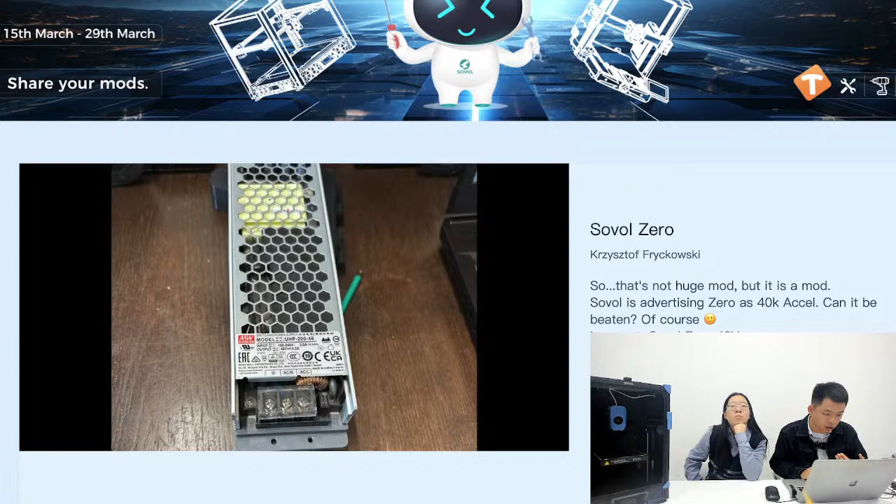Let me go back to the comment. He's kind of doing testing help for Sovol, and he also started to mod it right away. So as he said, it's not a huge mod, but it is a mod.

Whether it is small or big, we welcome everyone to join. Every printer is unique, and I think we really honor the tinker spirit and open source spirit. Later you will see that some projects are very simple, but some people have time and are professional while others do not have time. But anyway, any small mod counts, no matter what brand printer you have. So back to this mod - crazy stuff, not huge, but it is a mod.

Sovol Zero is advertising 40K acceleration. Can it be beaten? Of course. He presents the Sovol Zero 48 volt. Since the electronics are awesome, the X and Y drivers are TMC 5160 with external MOSFET, and it's ready to go on 48 volts out of the box. I thought, why not play with it? So he did some research around the board.

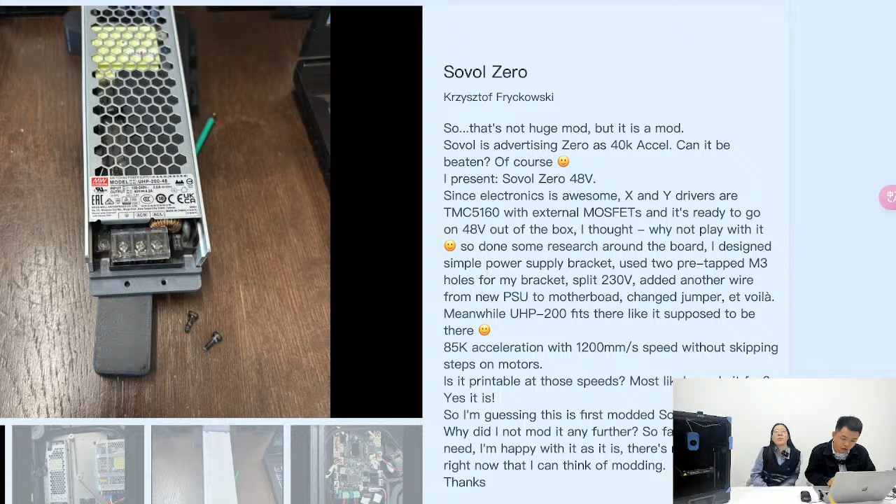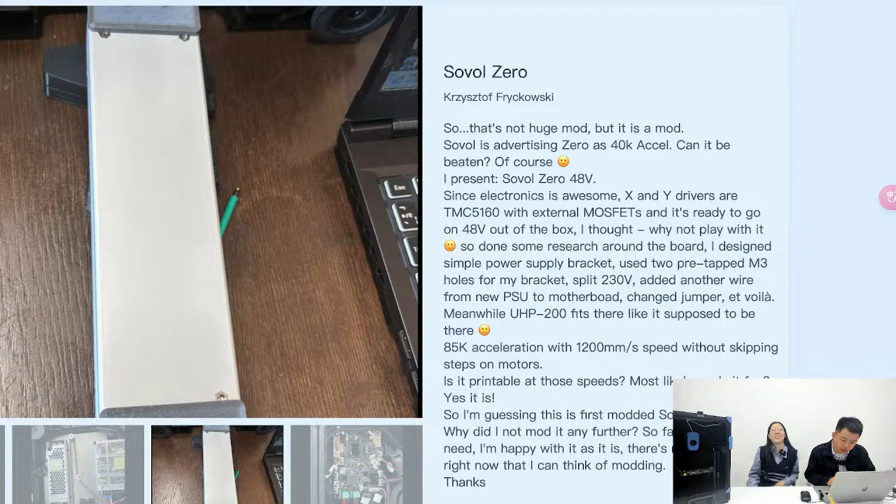I designed a simple power supply bracket, used the two pre-tapped M3 holes for my bracket, and split the 230 volt. Added another wire from the new PSU to the motherboard, changed the jumper - et voilà! And meanwhile the UHP 200 fits there like it's supposed to. It kind of became like, wow.

85K acceleration with 1200 millimeter per second speed without skipping steps on the motors. Is it printable at those speeds? Most likely no. Is it fun? Yes, it is. So I'm guessing this is a first modded Sovol Zero.

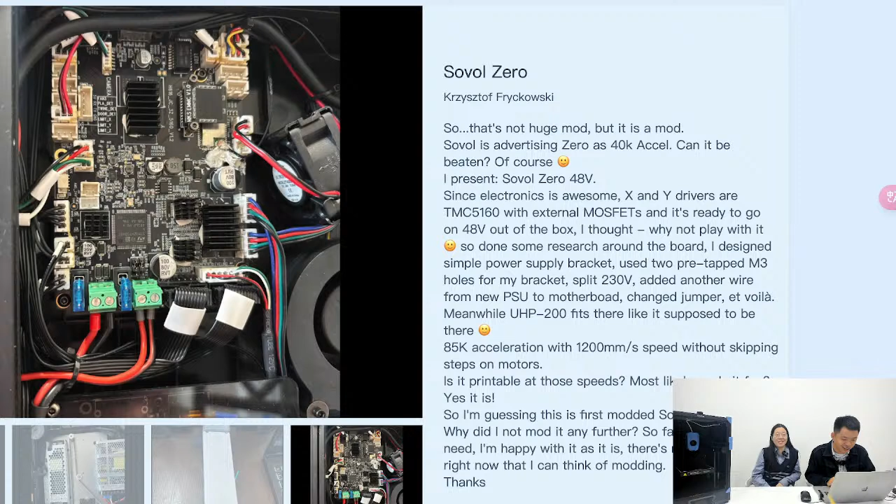Why did I not mod it any further? So far there was no need - I'm happy with it as it is. There's not much more right now I can think of modding. Great, yes, this is the first mod of the Sovol Zero, and this is fun.

Let's go back to the other mods. Maybe we start with the SV06 mods. SV06 is a really popular model of Sovol, back from about 2 years ago.

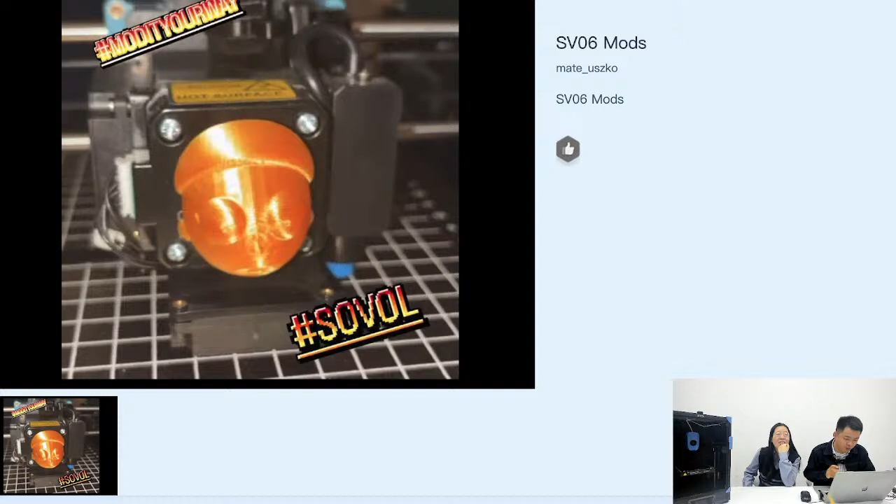This user is mate_uszko, his mod is very simple - he just changed the extruder knob. It's pretty simple but interesting - I think when the 3D printer is printing, the head will scroll upside down. So a very interesting one.

Oh, this one is something interesting - so many mods. This is the SV06 mods, it's from Arka. So a modded SV06. Julia, would you like to read out the description of the mod?

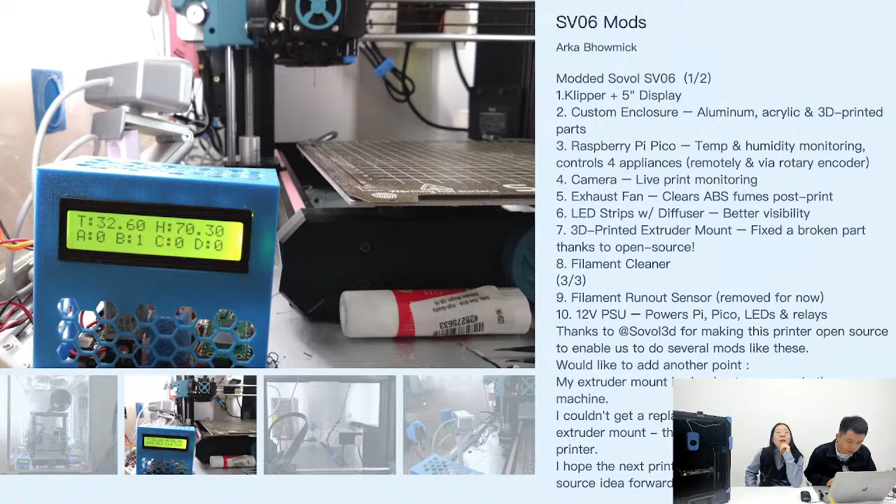Modded Sovol SV06. The first one is the Klipper plus 5 inch display. The second one is custom enclosure aluminum, acrylic and 3D printed parts. The third one, Raspberry Pi Pico temperature humidity.

Humidity monitoring, controls four appliances remotely, and rotary encoder. The fourth one is camera live print monitoring - this is my favorite feature. The fifth one is exhaust fan, clears ABS fumes post print. The sixth is LED stripes, with diffuser, better visibility.

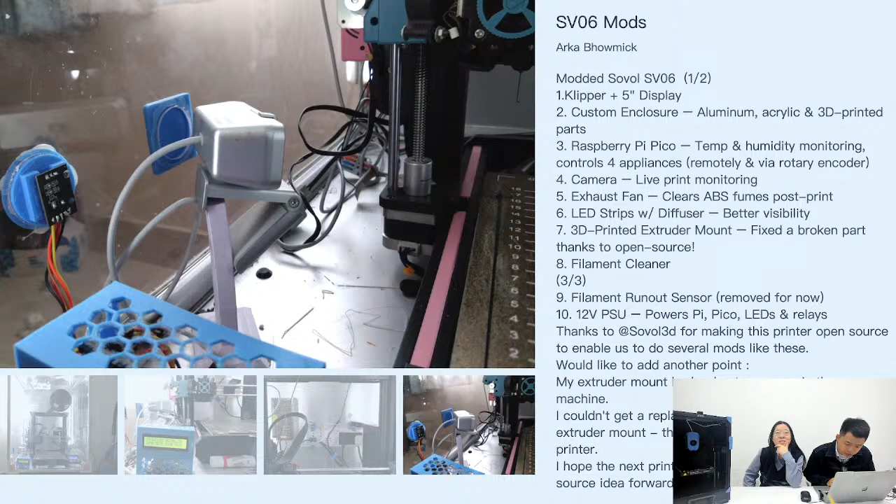Then it is a 3D printed extruder mount to fix broken parts, thanks to open source. The eighth one is a filament cleaner, and the filament runout sensor removed for now. 12V PSU, powers Pi, Pico, LEDs and relays. Thanks Sovol 3D for making this printer open source to enable us to do several mods like these.

Would like to add another point. My extruder mount broke due to an error in the machine, so I couldn't get a replacement. So I printed another extruder mount thanks to the open source of this printer.

The most important thing is... I hope the next printer would take Sovol 3D's open source idea forward. I think sometimes we lack support for replacement parts of some printers, whether we stop manufacturing or it still exists, but anyway, I think the open source part gives the user another possibility or solution to fix it.

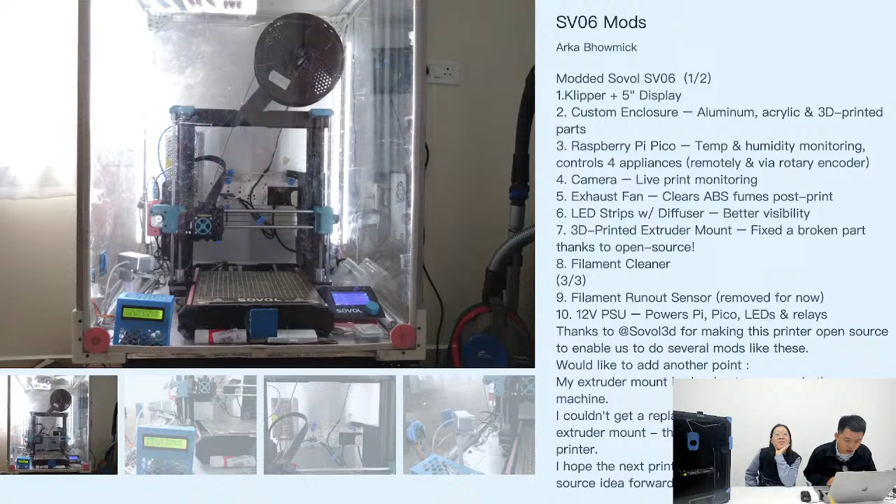Another one is from, I think, another brand - another mod. It's from this user called 3diocrity, so it's a Voxelab Aquila X2 mod. He presents the current form of his ever-evolving Voxelab Aquila X2.

It's one of the 3 printer lineup that may get a shake up this year if I can get my hands on the Sovol Zero.

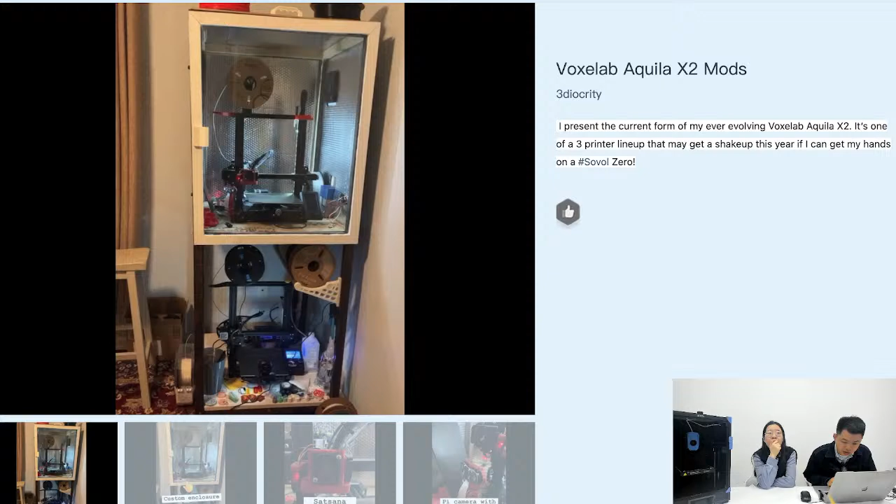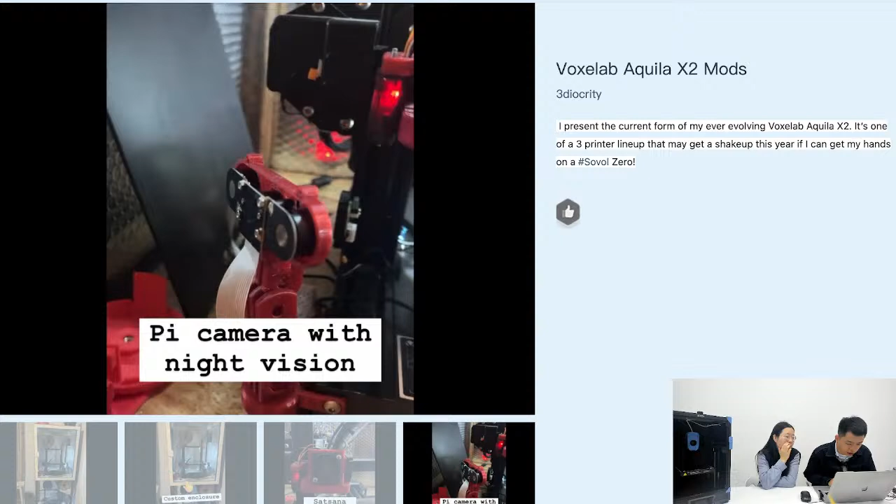Yeah, custom enclosure. So I think the last model we showed also had this big enclosure, right? He just enclosed everything - that's the Sovol 06. He also has this Satsana fan shroud, and a Pi camera with night vision. That's awesome. I think everyone has seen that meme picture - there are so many sounds at night you don't notice, but once the printer makes any sound, you immediately wake up. So this Pi camera also provides an interesting function for that.

Let's check out some more comments here. Flex Chen said he's excited to soon get back to modifying Sovol printers.

For Friendly said, I keep my printers with stock parts. Yeah, definitely not everyone is interested to mod the printer, but anyway, compared to other brands, we do have this extra fun factor for it.

So let's go to another mod here. Wow, this one is awesome - it looks like a PC, like a computer, not a 3D printer. This is so complex, yeah, it's crazy.

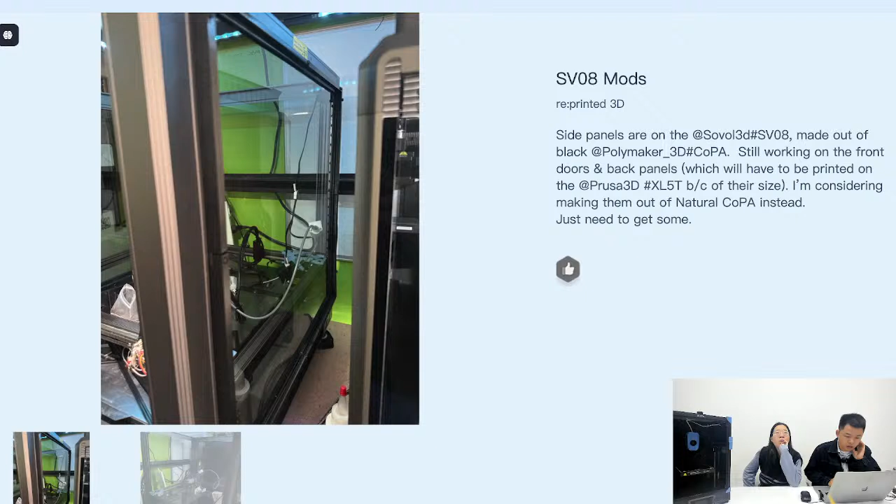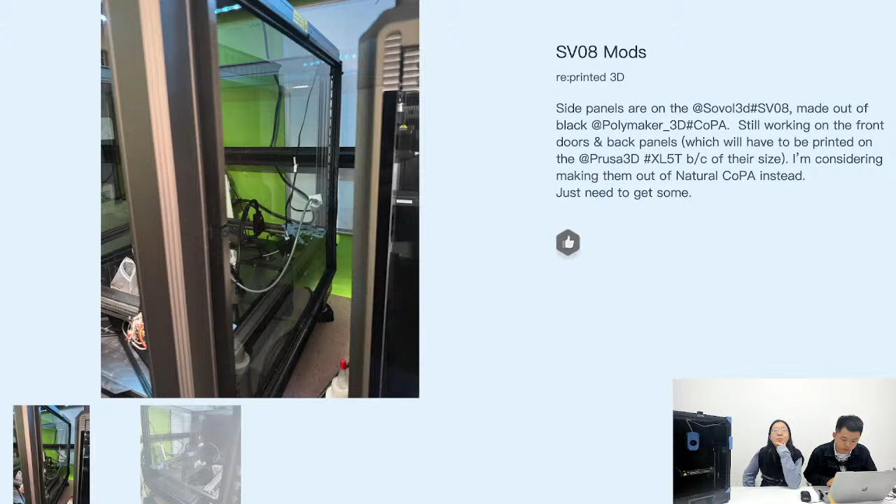So there are SV08 mods. In the contest, many people uploaded mods about the SV08 - the number of SV08 mods is about 50. This work is by reprinted3D. The panels on the Sovol 3D SV08 are made out of black Polymaker CoPA. Still working on the front door and back panels, which will have to be printed on the Prusa XL5T for the size. Considering making them out of a Natural CoPA instead - just need to get some.

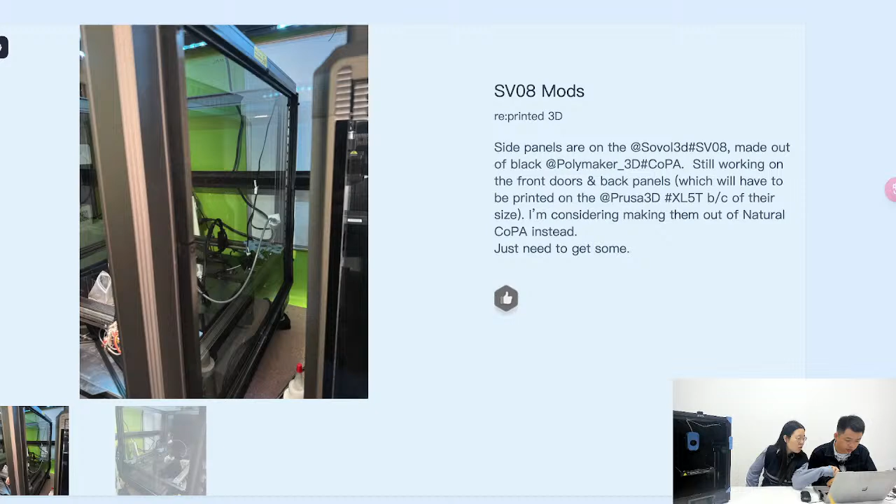Here we can look at the overall pictures. Yes, okay, another picture. Wow, this is awesome, yeah, this is awesome.

There's another comment here - boys custom 5 said he saw a mod to cover part of the SV06 Plus power supply fan to make it quieter. He noticed the SV06 Plus Ace Plus fan is also loud, and asked if we have any recommendations for how to make it quieter.

Temporarily we do not have any suggestions, but we will feedback to the company, and I think that's why the community is also important for all the users. If there are any other solutions you find out with other users, maybe you could try them out. For us, we designed this printer to balance all the performance, so that's what we finally got - it's what you'd call loud, but that's the best solution we temporarily have. So maybe from the community you could find other solutions, like the cover part for the SV06 Plus, and later some other customer will share their designs, usually for free, and you could try them out.

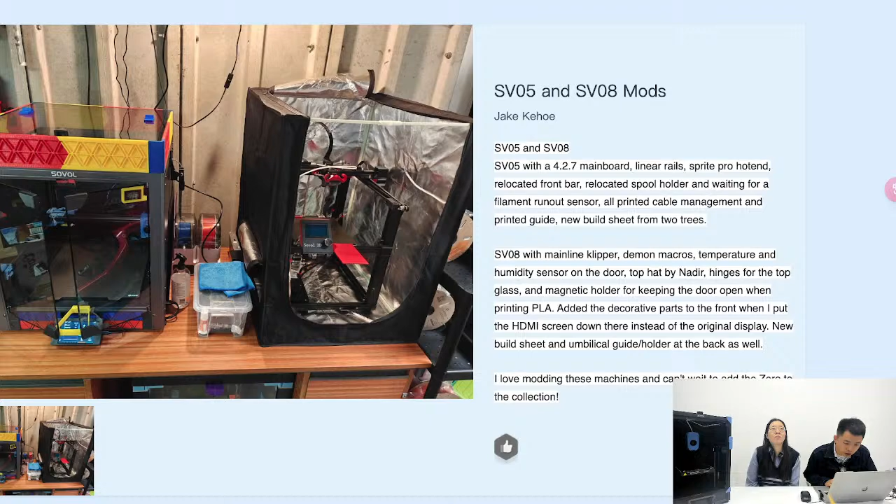4.2.7 mainboard, linear rails. Oh, he changed his structure to linear rails, and the Sprite Pro hotend, relocated front bar, and also relocated the spool holder and waiting for a filament run-out sensor. All printed cable management and printed guide. New build sheet from 2 Trees, and also with an enclosure.

So Julia, yeah, SV08. SV08 with mainline Klipper, demon macros, temperature and humidity sensor on the door, top hat by Nadir, hinges for the top glass, and a magnetic holder for keeping the door open when printing PLA. Added the decorative parts to the front where I put the HDMI screen down there instead of the original display. New build sheets and umbilical guide holder at the back as well.

I love modding this machine and can't wait to add the Zero to the collection.

Yeah. Yes, many people look forward to adding the Sovol Zero.

We can look at the comments. Jason herself: excited to get my Zero, order is impatiently waiting, thanks for the great work. We look forward to your great work on Sovol Zero. If you have a chance, you can share your beautiful work on the Facebook Zero official group.

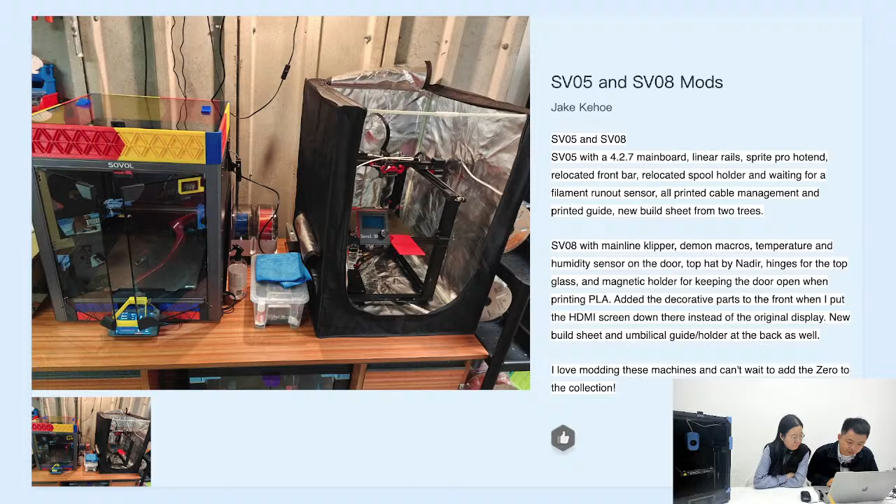And then we go to this SV06 Plus mode. Okay, this is also a very awesome old model. It's a bigger version of the SV06, capable of printing most life-size prints, more or less.

Okay, so I think JR 3D Decorations asked when Sovol Zero's two-head will be for the SV08. We are still working on it. I know every, maybe not every, but most customers of the SV08 want the Sovol Zero's new two-head.

Yeah, actually there is also a vote from our best admin Rory, he made a vote in the SV08 official user group asking if anyone wants Sovol to make this upgraded Sovol Zero two-head for the SV08. As far as I know, there are more than 200 people who voted, and more than 60% voted yes. So I fed back this post to the company, so we are already working on it.

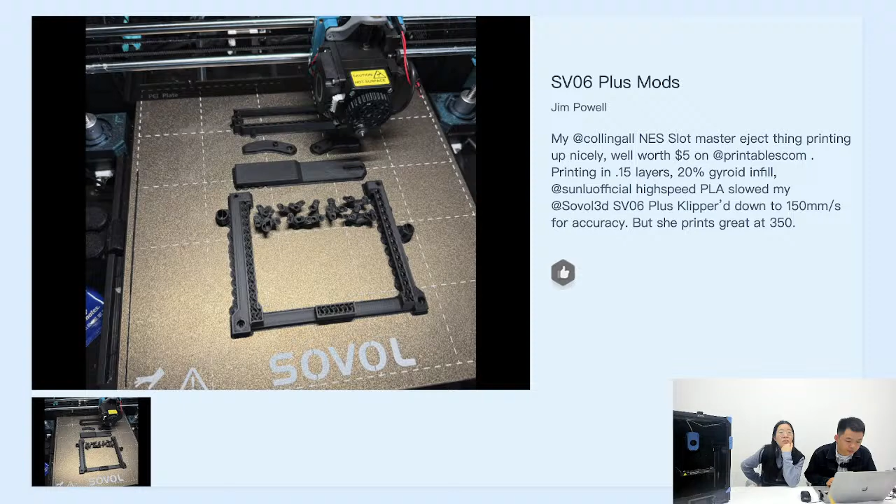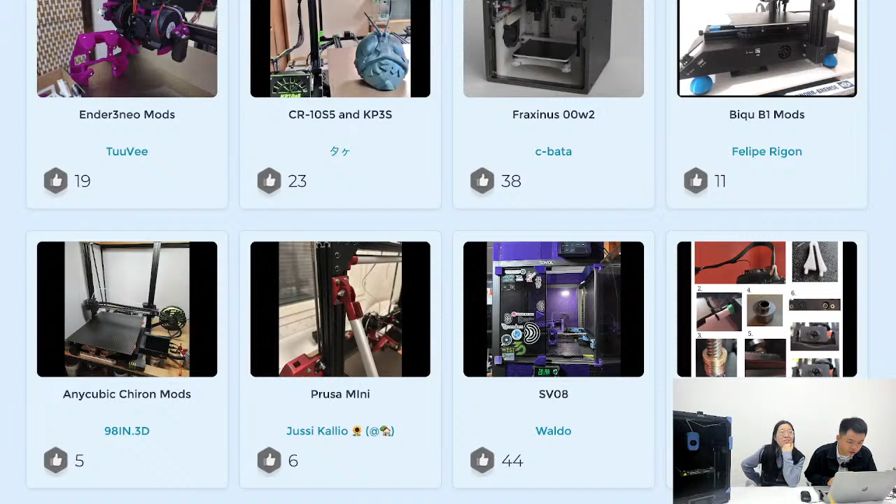So then we go to the Ender 3. Julia may not own an Ender 3, but it's the most popular 3D printer before Bambu Lab. It's a really classic model, most people know it, and most people maybe have one. So, okay, exactly, this model is called the Ender 3 Neo.

Since Creality made so many Ender series printers: Ender, Ender Pro, Ender V2, Ender Neo, Ender V3, Ender V3 Plus, Ender V3 SE, I don't know, so many models. Yeah, it's great I still remember the names. I kind of worked for Creality for 3 to 4 years, back from around 2018 to maybe 2021, 2022. So anyway, back to this mode.

And this is also the Creality CR10S5 and the Kingroon KP3S.

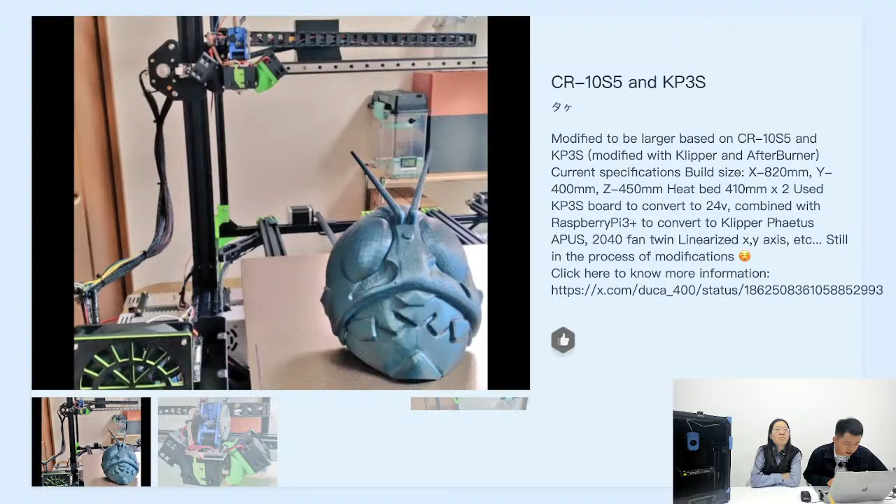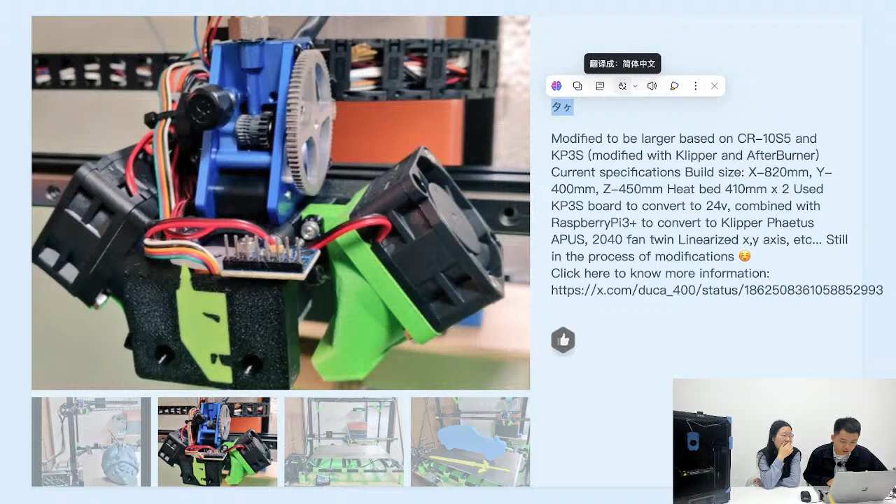Oh, this is a really awesome one. From a customer, his name is... he's Japanese, so sorry, I cannot speak his name, but I think you could see it. Maybe I'll use some translation here. Is there any translation? No. Maybe I should change to English. Anyway, thank you for joining the contest.

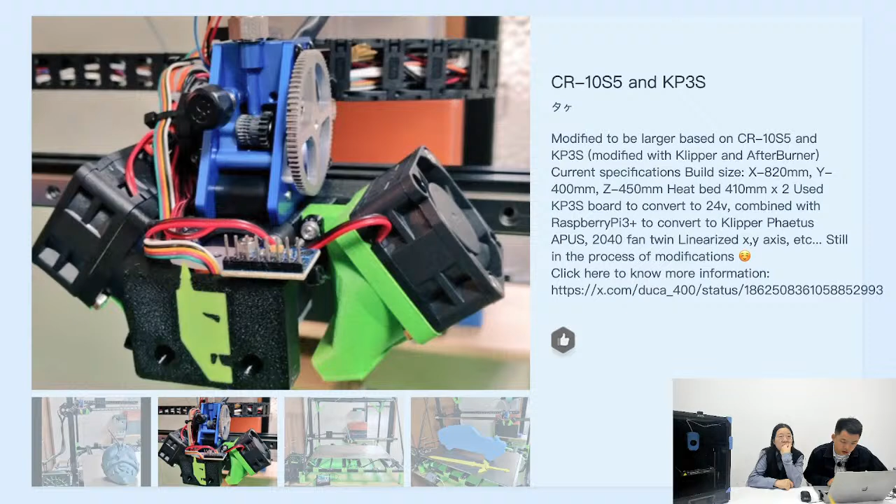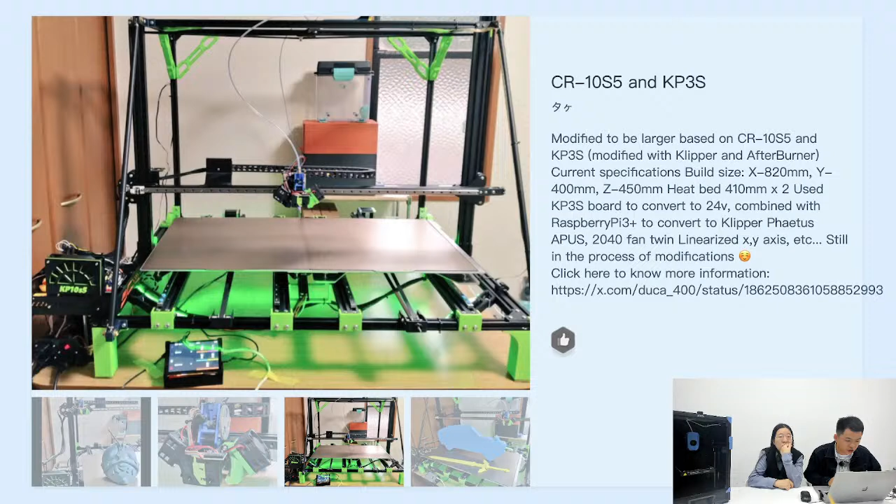Let me read through it. Modified to be a larger based CR10S5. I think till today there are still very few options for a bigger print size, maybe a huge print size, maybe life-size build size. Even today there are only a few models, and the print size is 500 by 500 by maybe 400 millimeters.

Anyways, modified to be a larger based CR10S5 and KP3S, modified with Klipper and Afterburner. Current specification build size: X-axis is 820 millimeters, this is huge. Y-axis is 400 millimeters, and the offset Z-axis is 450 millimeters. Heat bed is 410 millimeters times 2, using KP3S board to convert it to 24 volt, combined with Raspberry Pi 3 Plus to convert to Klipper, Phaetus APUS, and 2040 fans, twin linear rails on the XY axis.

Wow, okay, etc. Still in the process of modification, so still not finished. We are really looking forward to it if you will share any further progress of your modification. This is a really huge printer, but I think this will also be a really fast and great quality printer.

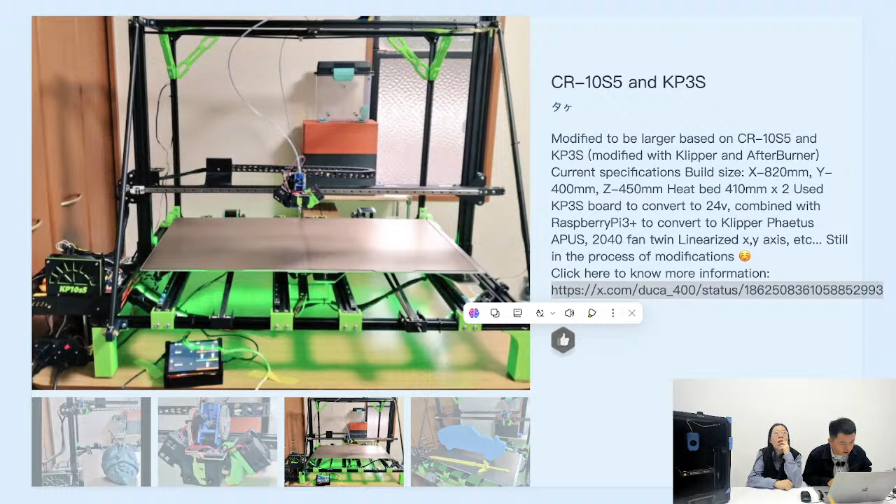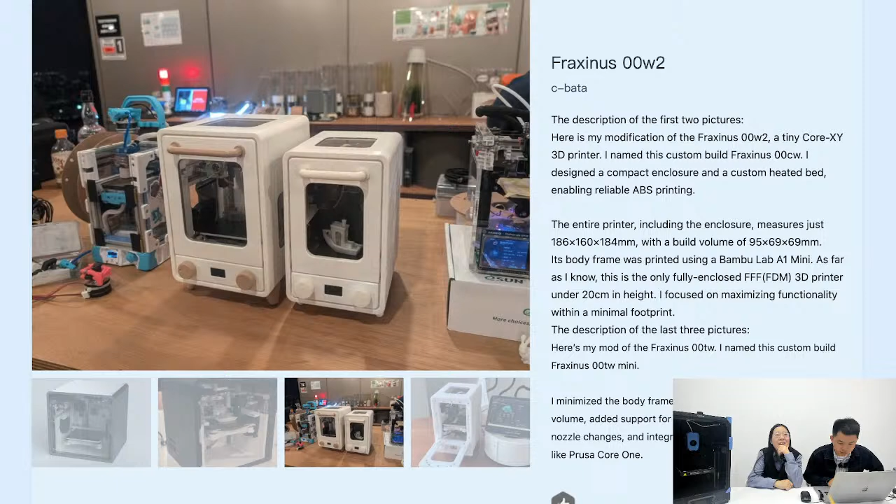So if anyone is interested in this customer's mod, you may check out his mod link. And this is the one that Yulia likes the most, I think. Maybe Yulia will introduce you to this printer because she thinks this is a really awesome printer since the customer kind of built it from scratch. So, Fraxinus, here is his modification.

The Fraxinus 00W2, a tiny Core XY 3D printer. He named this custom build Fraxinus. How to pronounce it? Yeah, it's a 00CW.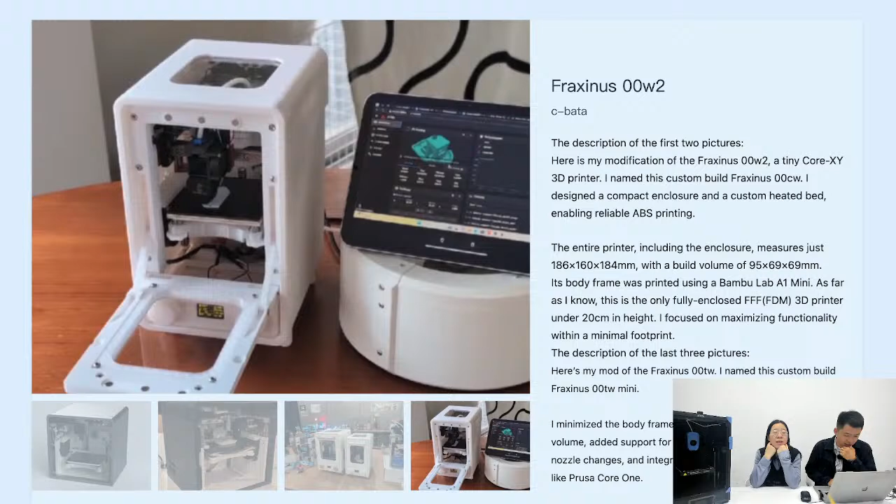He designed a compact enclosure and a custom heated bed, enabling reliable ABS printing. The entire printer, including the enclosure, measures just 186 by 160 by 184 millimeters, with a build volume of 95 by 69 by 69 millimeters.

Its body frame was printed using Bambu Lab A1 Mini. As far as I know, this is the only fully enclosed FDM 3D printer under 20 cm height. It focused on maximizing functionality within a minimal footprint.

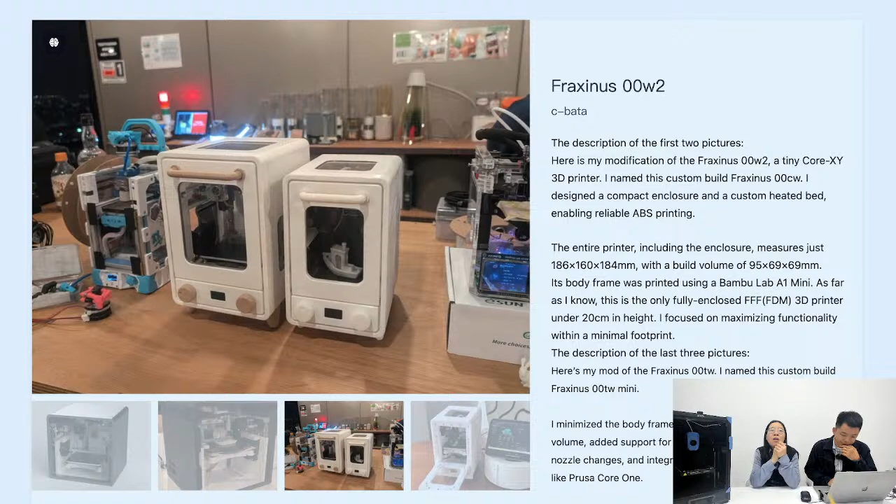The description on the last screen is his mod of Fraxinus 00TW. He named this custom build Mini. He minimized the body frame with only a slight reduction in print volume, added support for Bambu Lab's A1 hotends for quicker nozzle changes, and integrated 14mm fans on the back panel like the Prusa Core One.

Oh, yeah, yes, oh okay. So this customer kind of combined every advanced stuff, whether it's aftermarket accessories or all the latest brands like Bambu Lab, which is a very popular solution, to combine everything and build it from scratch. So this is really what the mod is all about. So yes, he built this thing he himself ever wanted. So this is really just awesome.

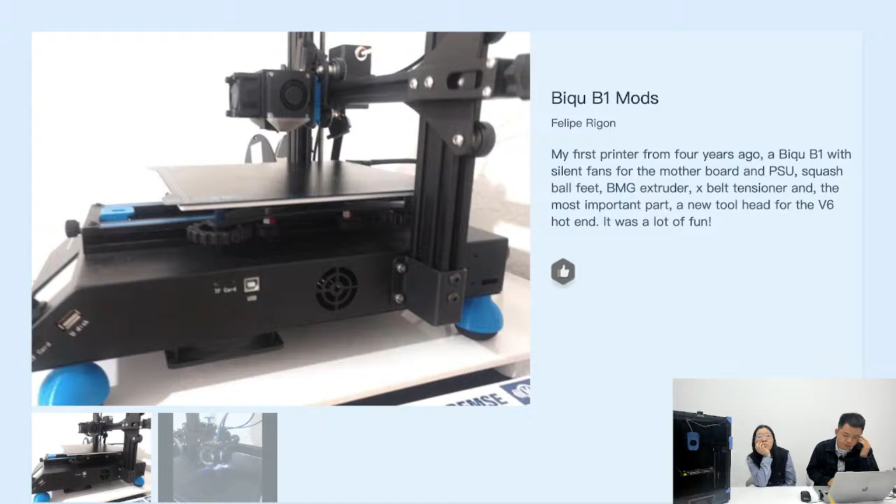A Biqu B1 with silent fans for the motherboard and power supply, a squash ball feet, a BMG extruder, X belt tensioner, and the most important part, a new tool head for the V6 hot end. It was a lot of fun.

Even with some LED light, I think once you turn off the light of the room, it should be really interesting. Yeah, interesting thing.

Germany Palmer, cool, I wanted to submit but didn't get a chance. Sorry, the contest is over, the time for posting work is over, but you have a chance to vote for it.

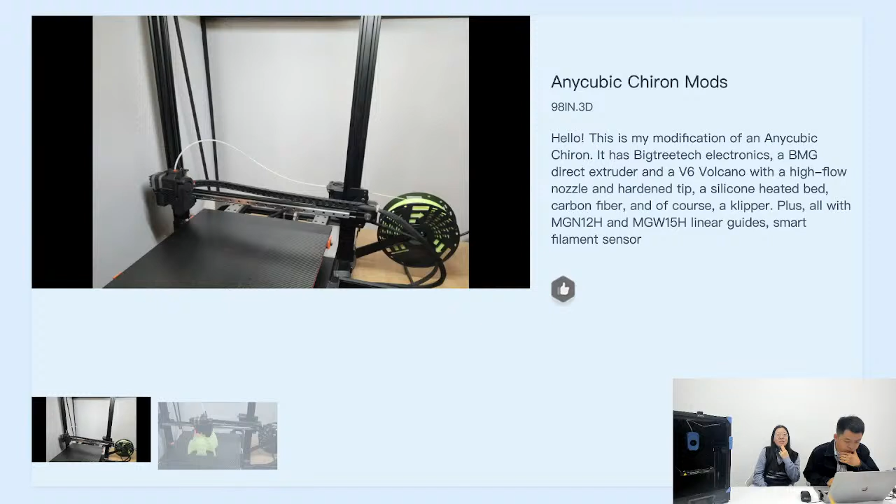Okay, let's jump to the next mod. This is really crazy, like the other one from the Japanese customer who shared his huge x-axis dimensions, but this customer has really crazy z-axis dimensions.

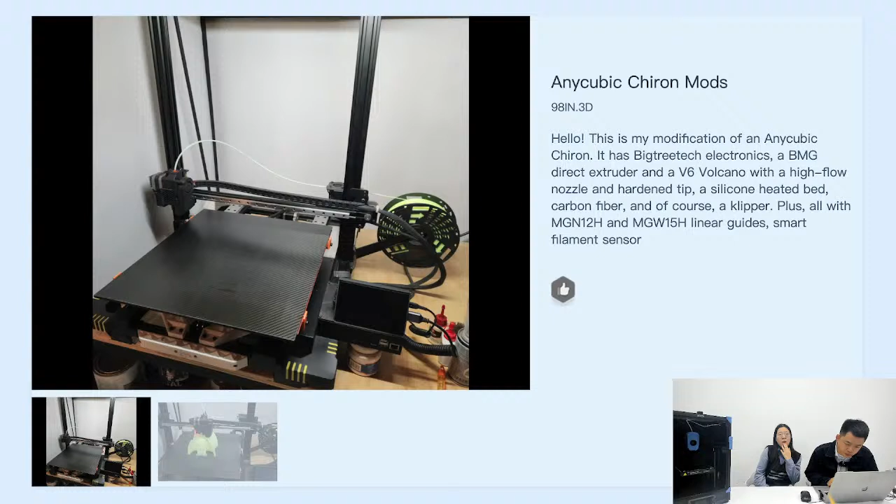So this customer's mod is of the Anycubic Chiron. He said, 'Hello, this is my modification of an Anycubic Chiron. It has Bigtreetech electronics, a BMG direct extruder, and a V6 Volcano with high flow nozzle and hardened tip, a silicone heated bed, carbon fiber, and of course a Klipper setup, plus MGN12H and MGW15H linear guides, and a smart filament sensor.' I think you have everything from every manufacturer there is.

I don't know when you did this mod and when you bought this printer, but I'm guessing it was maybe 3 or 4 years ago, right?

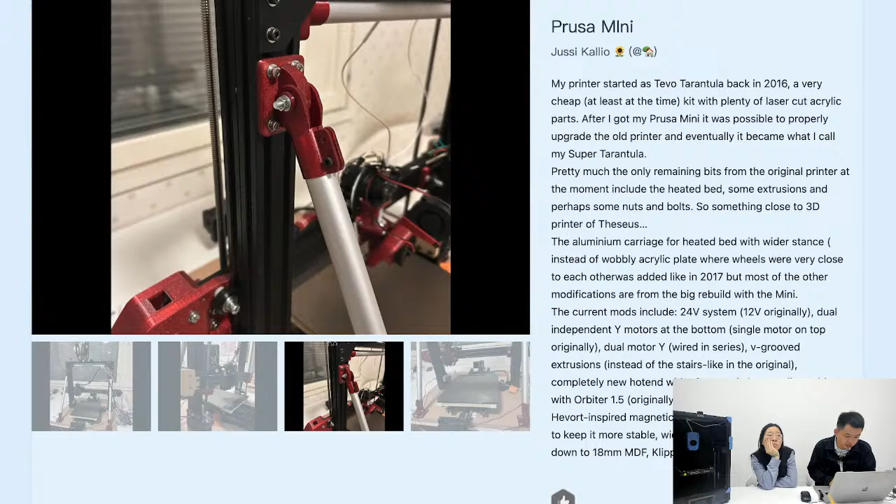And here's some details of this printer, which is really awesome. So back to the comment section, here are other customers joining.

Matt German, how are you? About the custom fab, he said he's been using a Bondtech CHT nozzle with his SV06 Ace, and it increased flow rate quite a bit. That's awesome. By the way, I think last month E3D just visited Sovol, so we do have some collaboration starting, so stay tuned.

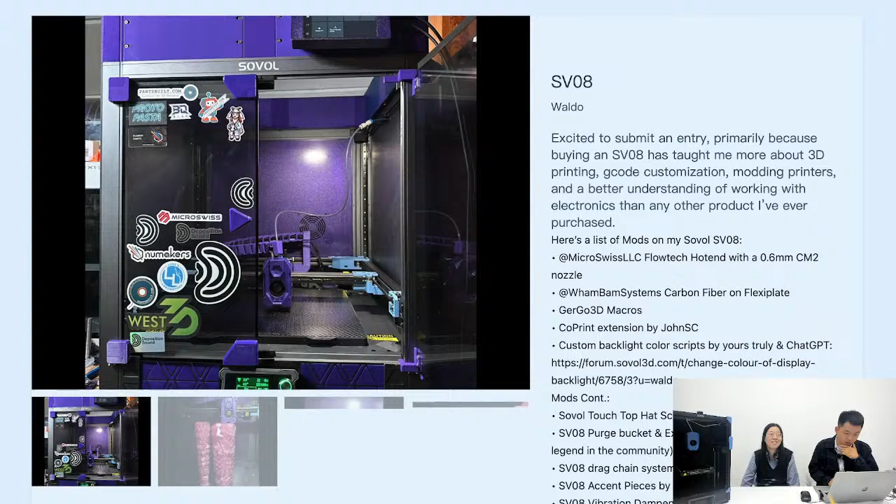Okay, and this one Julia also mentioned she really likes. Maybe it's the color, I don't know - maybe the purple color is the color most women or girls like, right? We shared it on X, right, yes. But anyway, Julia, you could just check out this one.

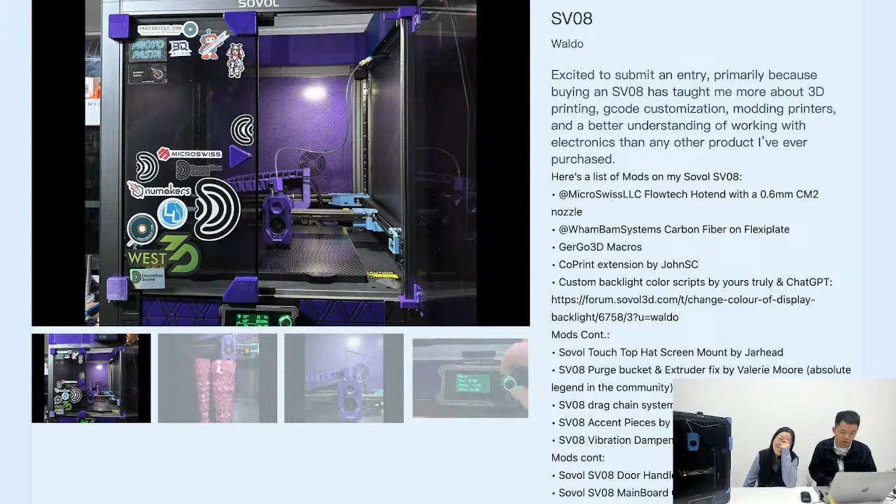Wow, this is even longer. You need to drink more water before reading this, or after. Anyway, he shares - I want to mention this customer is not a woman, but he likes this color.

Excited to submit an entry primarily because buying an SV08 has taught me more about 3D printing, gcode customization, modding printers, and a better understanding of working with electronics than any other products I have ever purchased.

We are so excited to read it because by buying a 3D printer, we wanted to learn more knowledge about it. Here's a list of mods on my Sovol SV08.

Flow tech hot end with 0.6 millimeter CM2 nozzle, carbon fiber flex plate, GerGo3D Macros, CoPrint extension by JohnSC, custom backlight color scripts by yours truly, and ChatGPT.

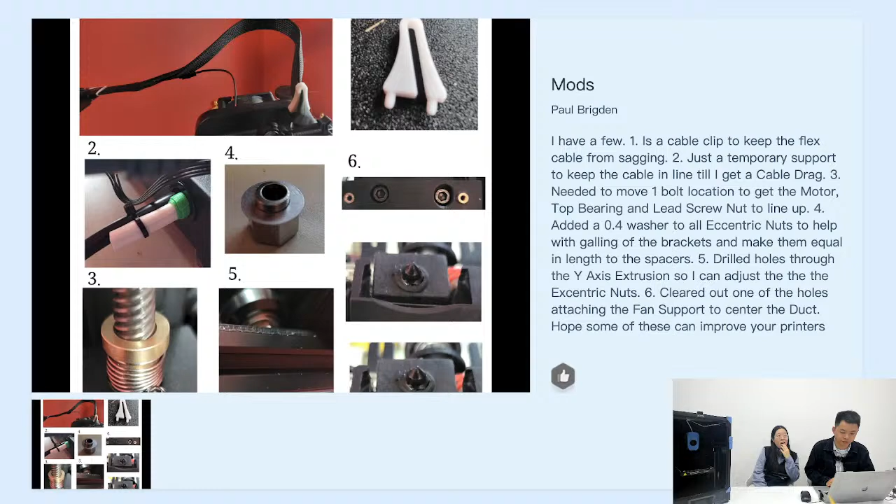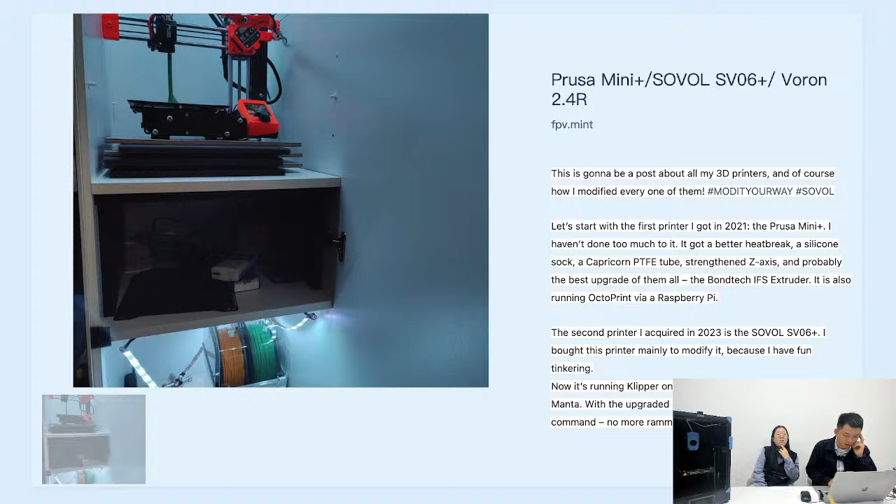Okay, this is from one customer who shared: here is a Prusa Mini, and also SV06 Plus, and also Voron 2.4. So 3 printers, wow, this is huge.

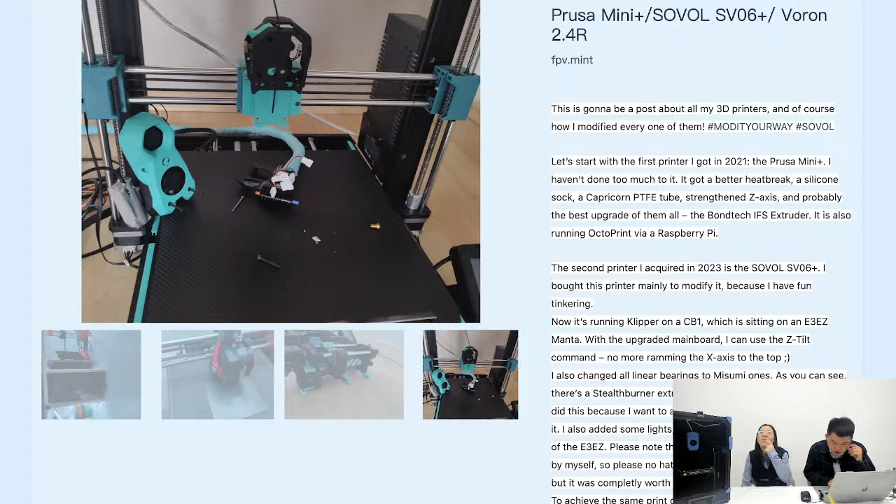Okay, before we check out this awesome mod, we'll check the comment section as well. Richard shared this link from Duet 3D. He expected this guy to enter the competition, but hasn't seen him.

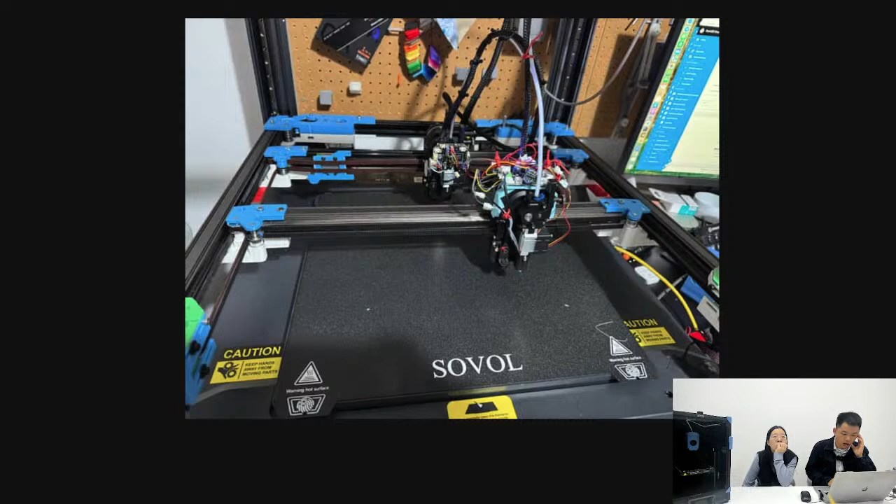Let me check this out. Oh yeah, actually for this awesome mod of the SV08, we already shared it last month, I think. Yeah, actually Yulia found it in the community and from YouTube, so we shared this customer's mod and his YouTube channel link so people could follow his further progress of this kind of IDEX SV08, right? Yes, if I'm calling it right. Anyway, thank you for sharing, it's great, yeah it's great.

And then we go back to... so thank you for sharing this, great one.

Then we go back to this customer, FPV Mint, he submitted this, I've got to check this out. So this is going to be a post about all my 3D printers and of course how I modify them. Hashtag Modify Your Way and hashtag Sovol. So let's start with the first printer I got in 2021.

Yeah, so the Prusa Mini Plus, he hasn't done much to it. It got a better heat break, a silicone sock, a Capricorn PTFE tube, strengthened Z-axis, and probably the best upgrade of them all, the Bondtech IFS extruder. It's also running OctoPrint via a Raspberry Pi.

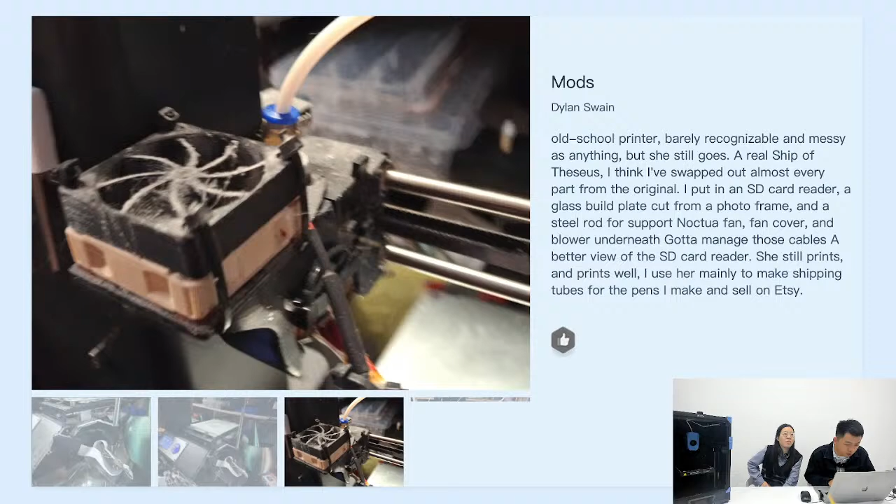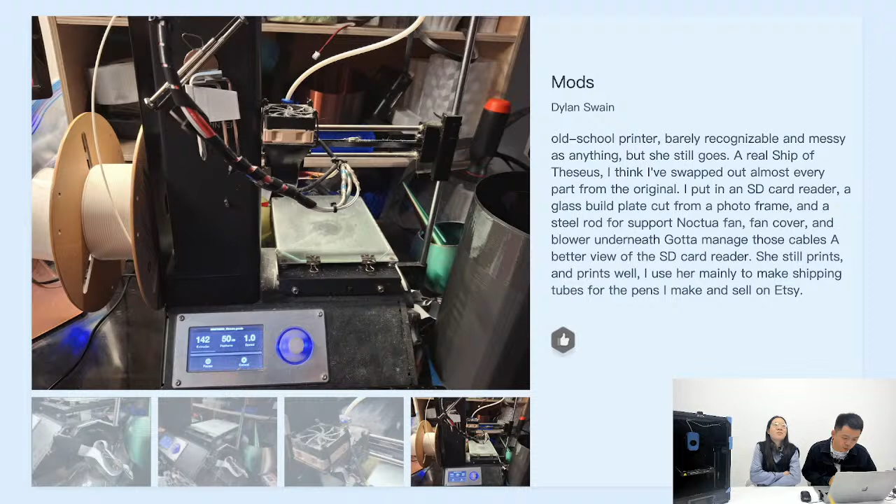Yeah, how about this one? How about this one? All right, this one is, wow. This one is... its mod is a Dylan Swain, so old school printer, barely recognizable and messy as anything. Yeah, we see that dust. It's like, I don't know. But she still goes, a real Ship of Theseus.

I think I have swapped out almost every part from the original. I put in an SD card reader, a glass build plate cut off from a photo frame, and a steel rod for support, a Noctua fan, fan cover, and a blower underneath. Gotta manage those cables, but here's a better view of the SD card reader. She still prints, and prints well. I use her mainly to make shipping tubes for the pens I make and sell on Etsy. Sorry the picture is really blurry, but yeah, it works.

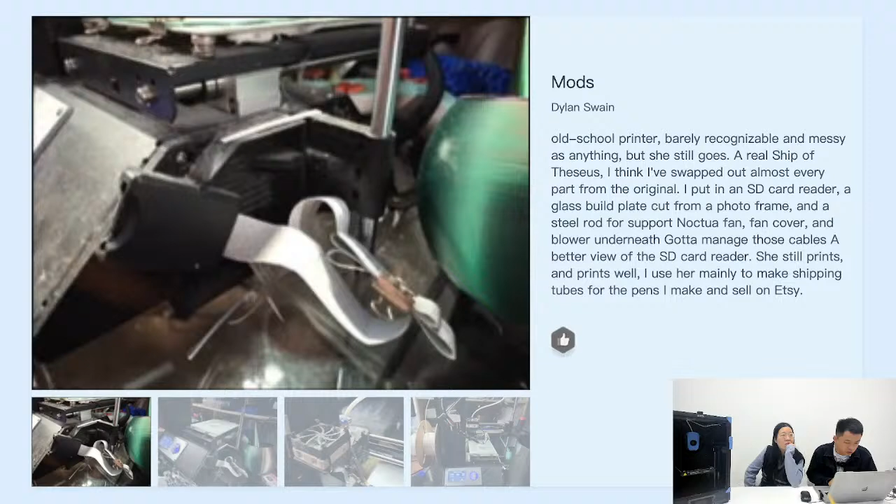It's awesome. I think this should be even earlier compared to industry standard, right? It's like 10 years ago. Yeah, I think Julia was maybe still in high school. So anyway, thank you for sharing.

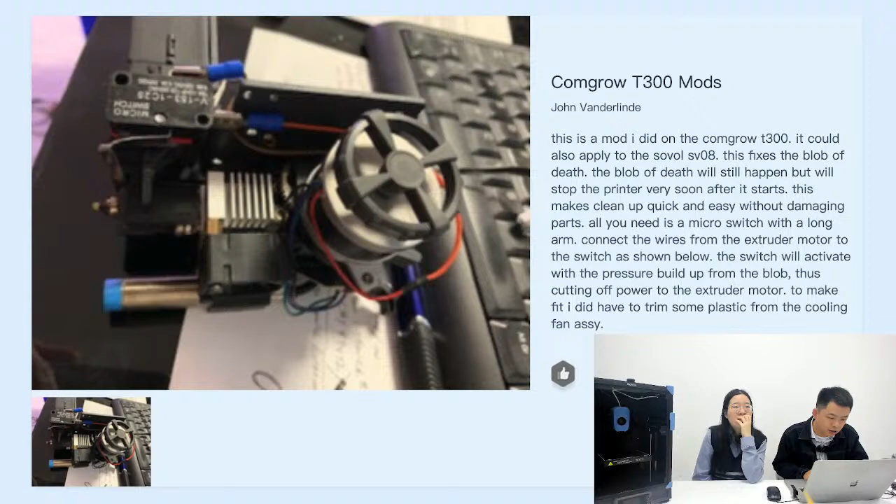SV07. Okay, so the SV07 is a printer I think some people really like and some people hate, because this printer is the first printer we ever created to use the Klipper system. So it has great speed, features, and qualities, but also has some bugs which caused some problems for later use.

Anyway, we always want to try something new. So I think at the same time there are also some problems with it, but we will not stop because of the problem, we'll continue to innovate. So I think these two sides balance each other.

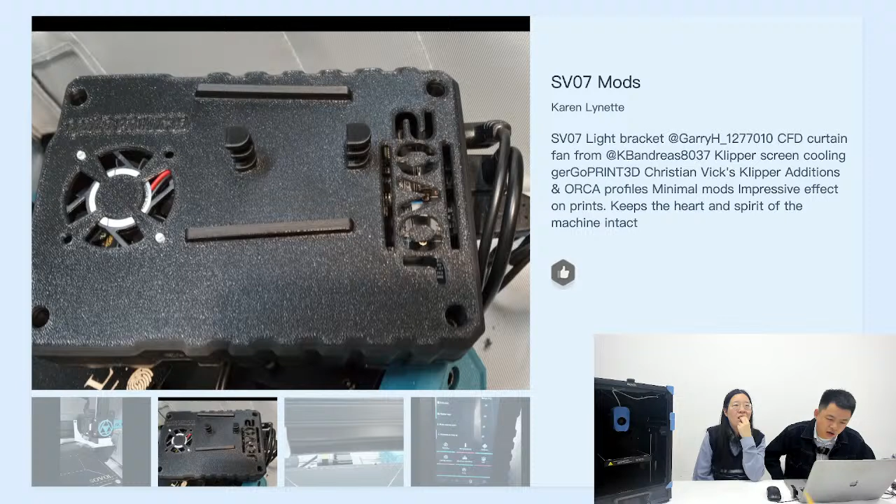So anyway, let's check out this SV07 mod. SV07 light bracket.

@GarryH CFD curtain fan from KBandreas8037. Klipper screen cooling and GoPRINT3D Christian Vick's, Klipper additions and Orca profiles, minimal mods, impressive effect on prints, keeps the heart and spirit of the machine intact.

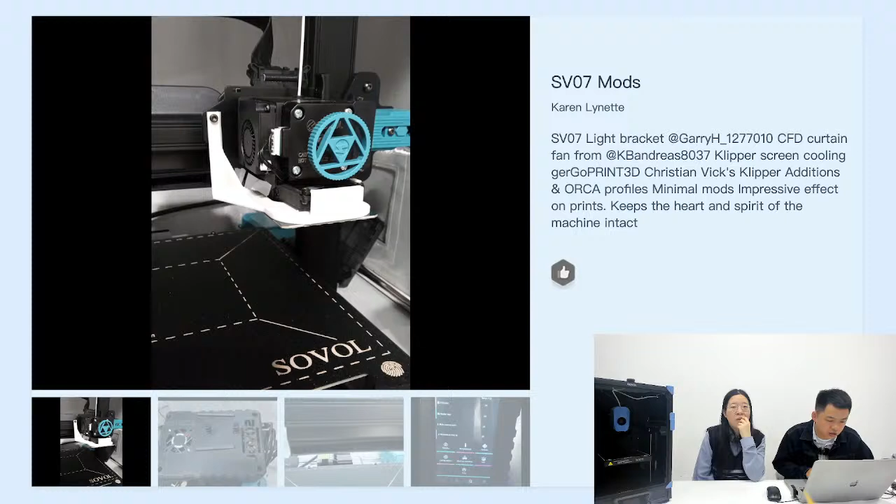Okay, so this customer, Karen, kind of used so many people's mod ideas and put them into the SV07. So this makes this printer even greater.

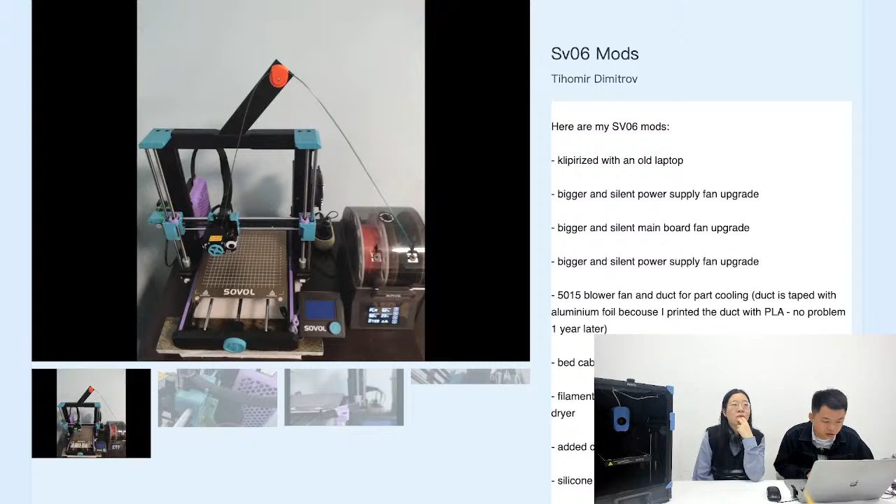Yeah, so maybe you kind of read the last two, okay? Okay, why, oh why always SV06 - so I think it's interesting, why every time I want you to read this it will be a long list. Yes, okay, anyway, let's start.

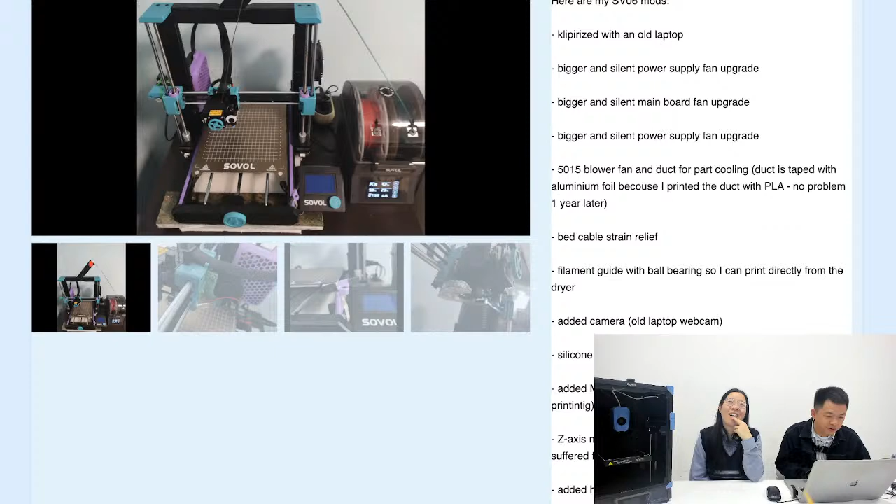Here are his SV06 mods. Klipperized with an older laptop, bigger and silent power supply fan upgrade, bigger and silent mainboard fan upgrade, bigger and silent power supply fan upgrade.

5015 blower fan, and duct for part cooling that is taped with aluminum foil because he printed the ducts with PLA, no problem one year later. Bed cable strain relief.

Filament guide with bearing so he can print directly from the dryer. Added camera, older laptop webcam, silicone bed mod and bed insulation. Added MOSFET to control hotend and heatsink fan, only on when printing.

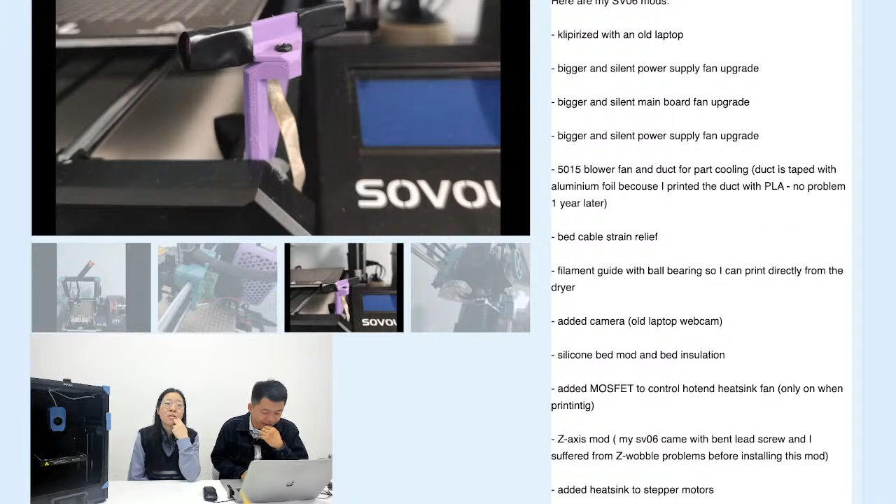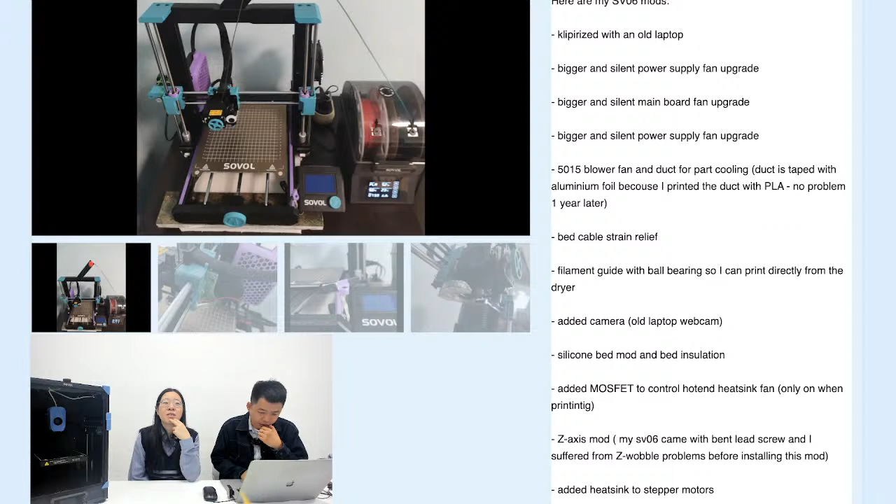Z-axis mod - his SV06 came with a bent lead screw and he suffered from wobble problems before installing this mod. Added heatsink to stepper motors. Display back cover.

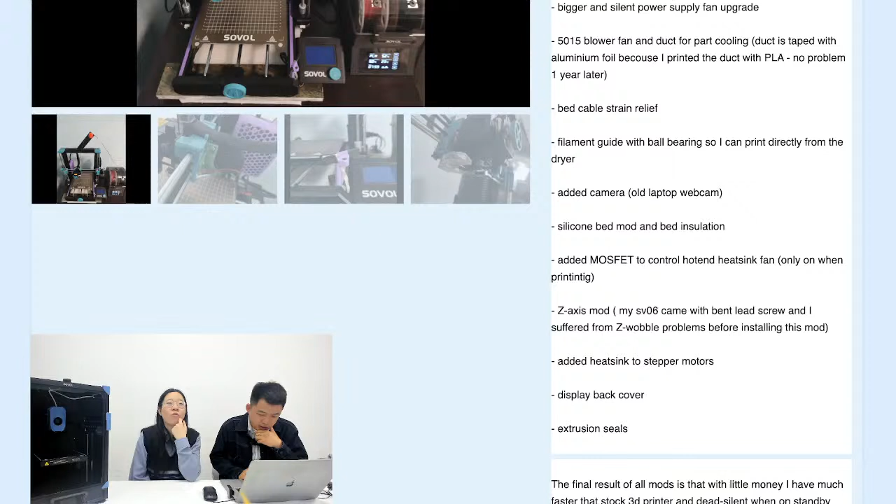And extrusion seals. The final result of all mods is that with little money, he has a much faster printer than the stock 3D printer, and it's dead silent when on standby.

Yeah, that is awesome too. That is when people don't print but they still turn the printer on, and some printers will still have their fans running. It's really loud. So yeah, this is great.

This is great. I hope this one, the last one from Rainy Corner's post, is not long. Okay, okay, this is a video. This should be the last one, right?

Yes, but anyway, you said this video - maybe we could check out this video. Yes, we can watch the video.

Okay, this is so slow. Yes, sorry guys, our internet is not that awesome, but yeah.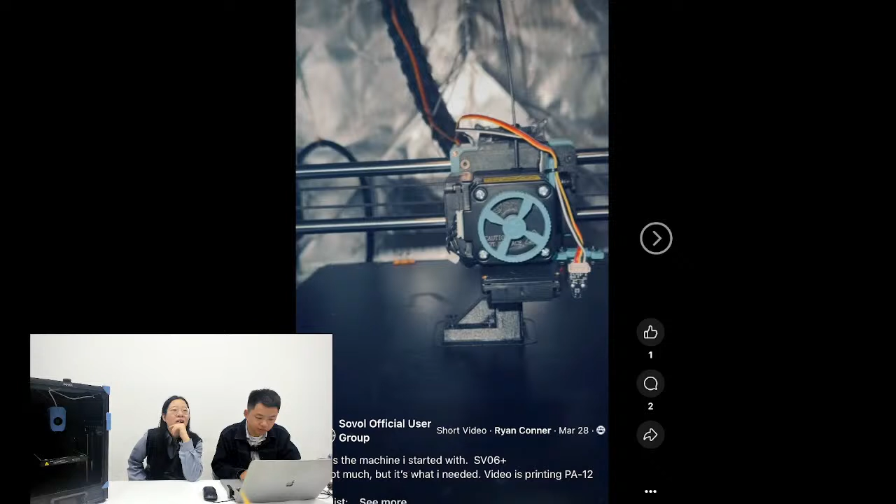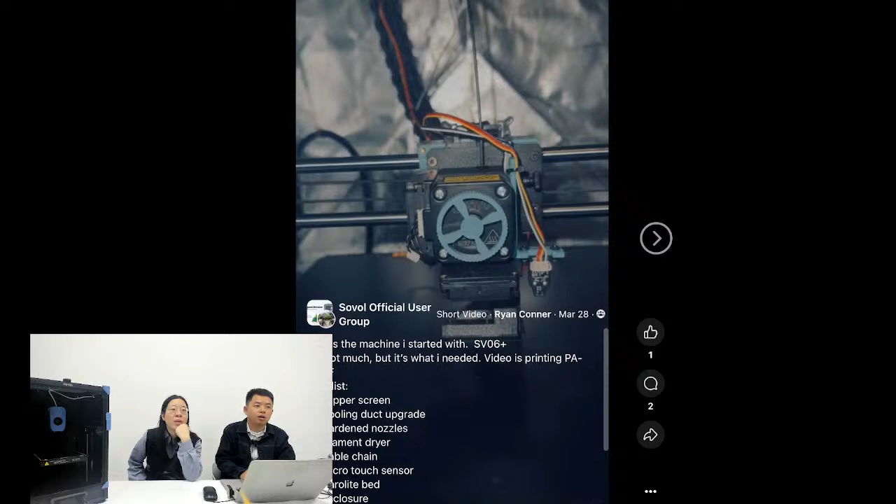This is the machine he started with, the SV06 Plus. It is not much, but it is what he needed. The video shows printed PA12CF mod list, Klipper screen, cooling duct upgrade, hardened nozzles, filament dryer, cable chain, micro touch sensor.

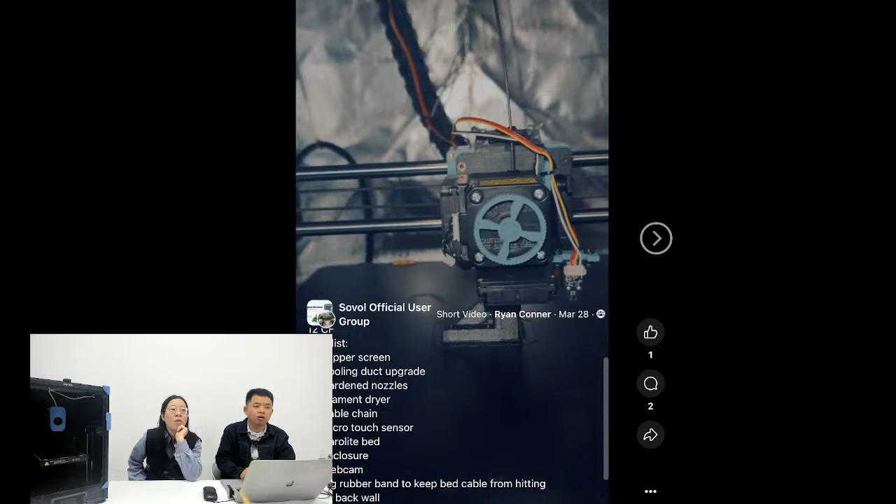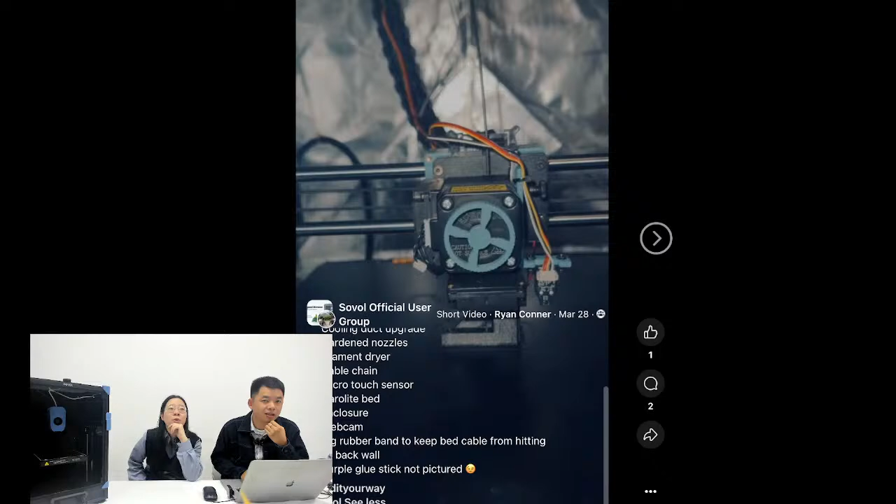Rubber band to keep the bed cable from hitting the back wall. Purple glue stick, not pictured.

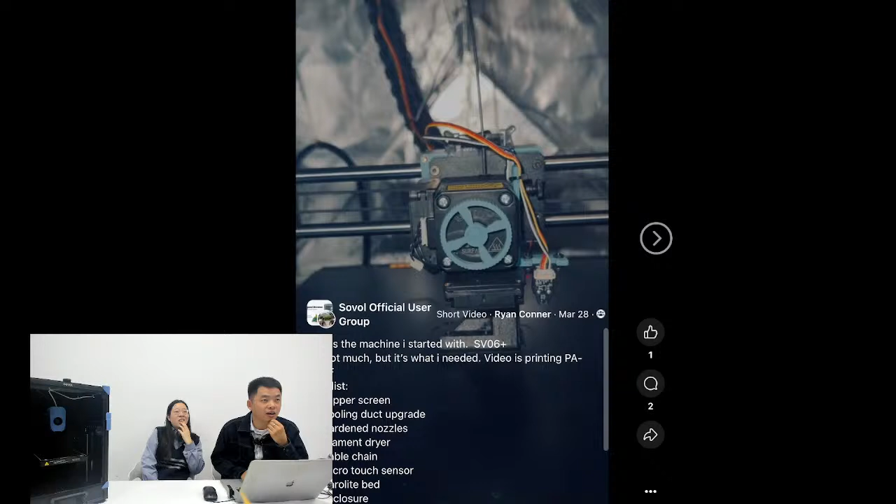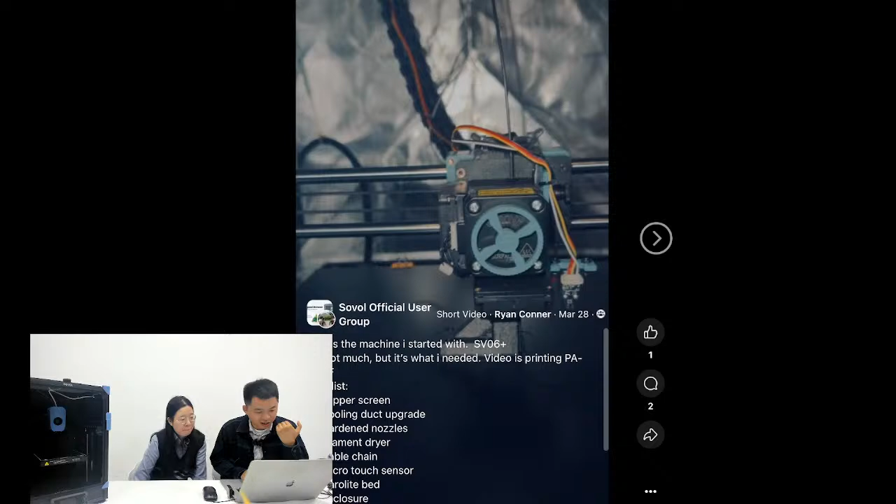Okay, so I think we've pretty much shared everything we wanted to share today. Still, there's a long list of modification content, but yes, we've already gone about 1 hour. So as I just said, we'll plan a second livestream to show off the rest of the modification mods.